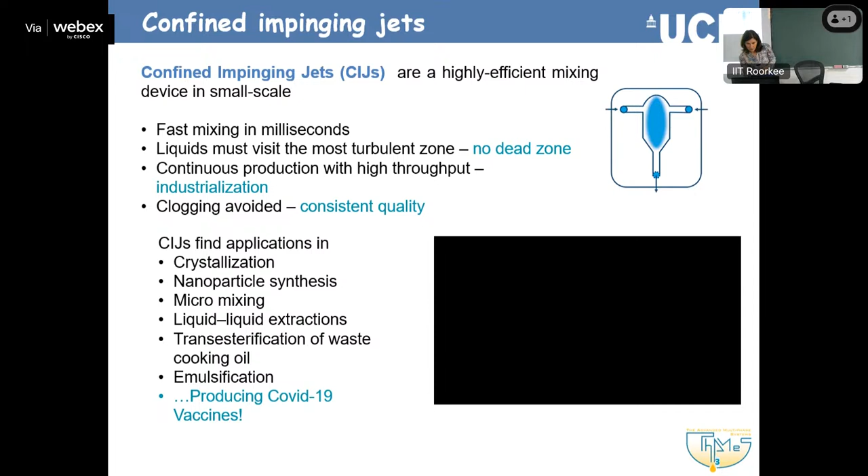Okay, yeah. I hope it doesn't change on its own. Scale out, number up. So we have one channel, works perfect. Let's use a lot of those. Any problems there?

Distribution - we have to consider the losses which are involved. We try to simulate dynamics, and when you go scale up, like from small to big, you have to consider all the dynamic similarities. Yeah, all the types of similarity, physical similarities playing a role.

This is important. That's how people used to do scale up, try to keep some sort of similarity between the processes. So if you have your small channels, one way to increase is what was mentioned, that you use more of them. The issue there, as somebody said, if you try to just use many channels, what is an issue? Flow distribution. How do you make sure that every channel has the same flow rate on paper, but in practice, how do you do that?

The other thing I will argue for as well is to actually increase the channel size. If you are looking for analytical applications, you can go to sub-millimeter channels, even smaller, because this is good, you decrease your sample volume. But if you want to think about production, there's no reason to go sub-millimeter. Actually, there are very good reasons to not go sub-millimeter because you might have some dirt, some impurities, and clog things.

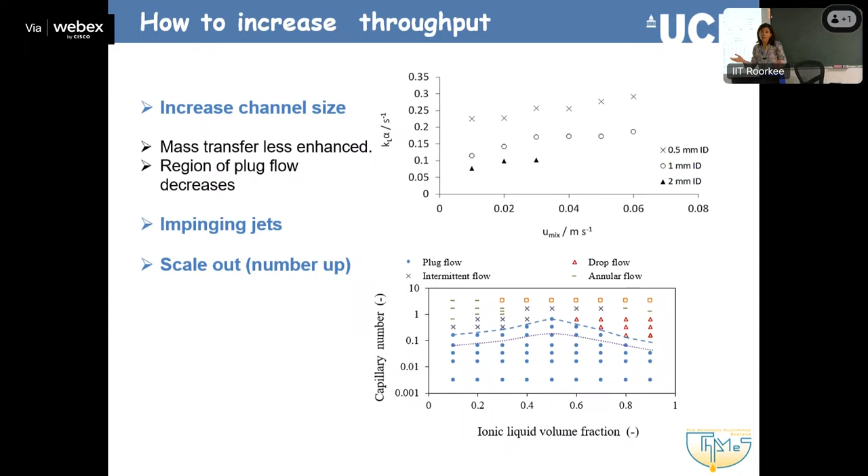Okay, let me see if that plays, because that's something a student found. I think there was a website here to attribute this, I should add it. So this is an impinging jet, and apparently, according to my student, it had been used for the COVID vaccine production. I can't believe it, but there's a reference somewhere. So basically, impinging jets is something we have started working on.

Impinging jets have been around forever in fluid mechanics, usually in unconfined spaces where two jets collide. And as all these microscale things started coming up, people have started limiting the space where the jets collide. This is how we work, with confined impinging jets.

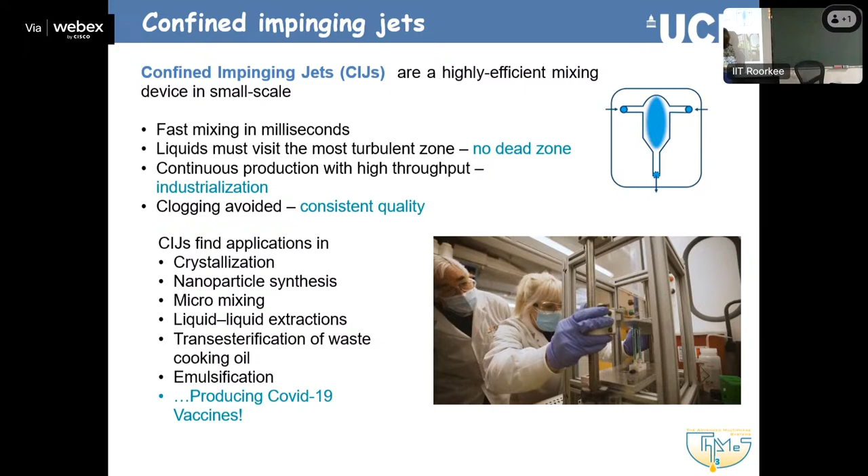So what you get there, as it shows here, is very fast mixing. And because of that, there have been applications in mixing, first of all, fluid to fluid mixing, crystallization, because you get very good mixing, nucleation happening, crystals forming, nanoparticle synthesis, which is related to crystallization, and so on. And we have used it for extractions.

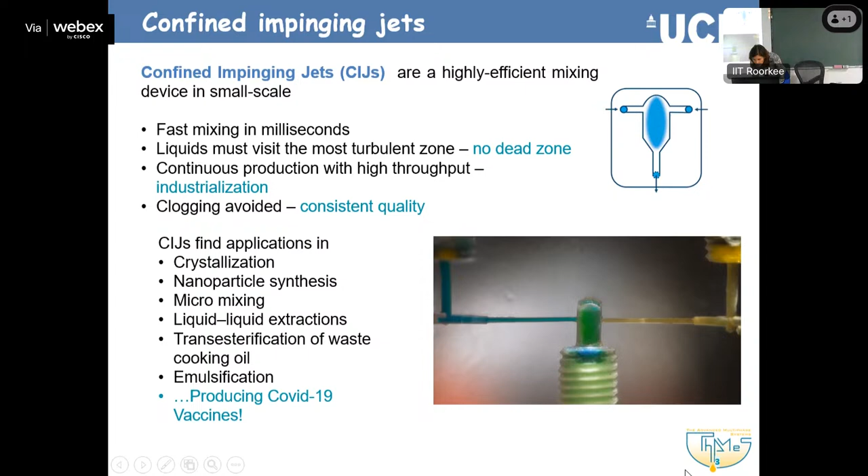Okay, so if you want, this is a cool video. I can give you the reference as well. So this is our impinging jets, and this is the first generation, let's say.

As you can see, it's a very simple setup, what we did in the lab. This was done with acrylic, that's our impinging jet here. You can also 3D print it if you have a 3D printer, which is more common these days. But in the end, we just connected those two channels.

Our first generation has this type of configuration: a T-junction where your side channels are very small, but the main channel is relatively bigger. So the fluids come in with quite a big velocity because they are in very small channels, and they impinge.

And because of that, that's the type of flow we form. So we form dispersions, coming back to your drops. But now we work more with these symmetric impinging jets, because with the earlier ones, in terms of mixing, there were some dead zones, so we thought we would try these ones.

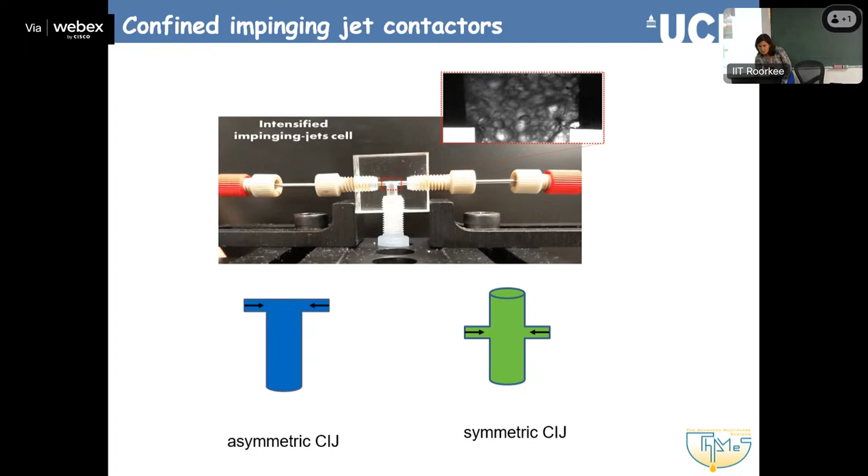I think I showed that to you before when we were discussing the different measuring techniques. So this is the setup we are using for the impinging jets, and this is the actual geometry of the symmetric impinging jets. Again, we have the two side channels here, they collide here, and then the mixture comes out both ways.

Some properties: we have played a bit with this inlet diameter size, we've gone down to 0.25, and with this outer tubing size. So the inner ones are the two jets, the outer is where the jets are, these two side channels, and the outlet is this main channel where we want our reaction to happen, or separation.

We use 2 millimeters here because I come from large scale flows. I have been working with oil-water flows at large pilot scales. One thing you have when you have two liquids is a lot of liquid, and if you start using solvents, it's a lot of solvent you have to do something about.

In fact, with these sort of systems, because the velocities are bigger, we start having a lot of fluids to deal with. So if it's not necessary, in this case we put the tubing small, because it means we have to handle less volumes of fluids, which is important. Gas-liquid flows are much easier, they only do this with air, at least at atmospheric conditions.

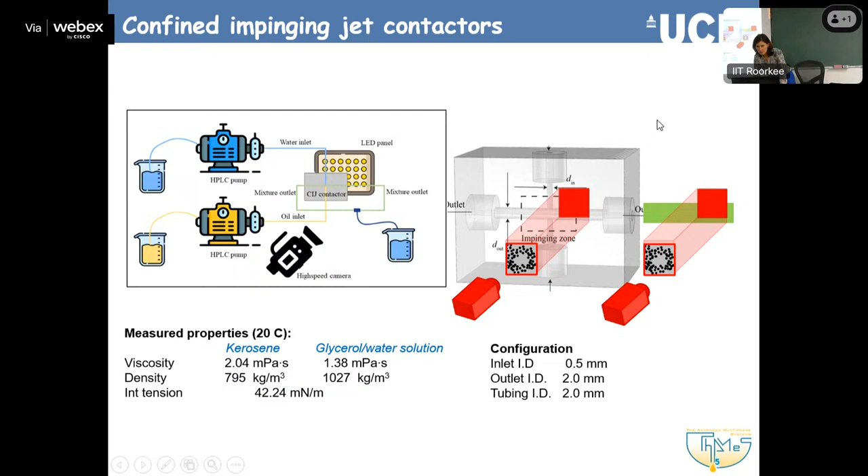Again, very briefly, these are things you find in the literature. We did a flow pattern map. In this case, I think we used some glycerol in our water, we had kerosene-water with some glycerol, just to remove some of the reflections. So we were able to improve the images a little bit, and you get all these flow patterns again.

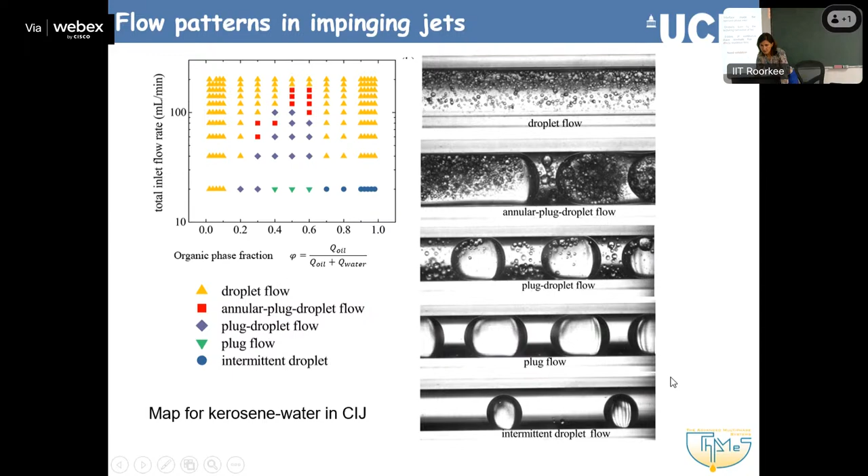The one we really want to work with is this droplet flow, or some variations of that, and we are trying to do some studies of these flows. Yep, and that's what you actually get in the impingement zone.

What we have here, and the reason for that is to aid visualization: we have the aqueous solution coming from the jet underneath, and the organic solution coming from the jet here. We have a lot less organic phase, and the only reason is so that we are able to see and take some images, some videos.

Because if you increase the organic phase volume fraction, it's very difficult to see. That goes back to what we discussed about imaging techniques. Imaging is marvelous, but once you start having interfaces, it's very difficult to see what's going on.

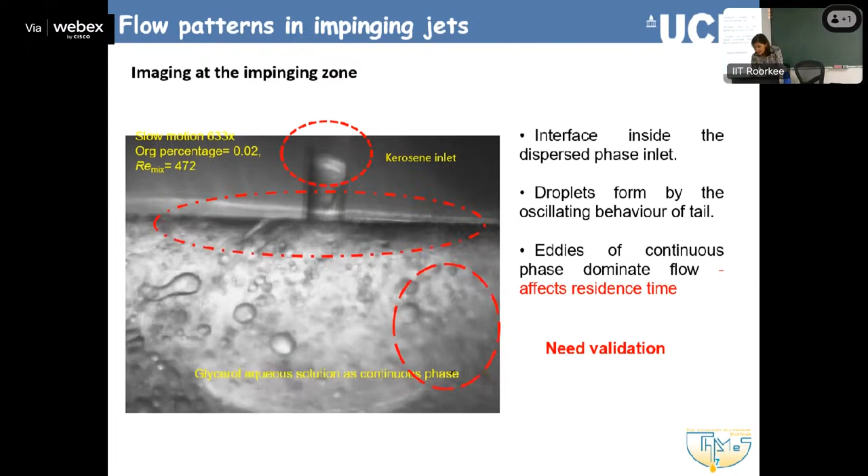So there are various phenomena. This is very interesting also just for studying how the mixing happens there before we move on to study the separation. There are various phenomena, and it's very difficult to actually see what happens with imaging. So we had our hand at trying to do some modeling, and there are some modeling people at the back there, but maybe how to do it better.

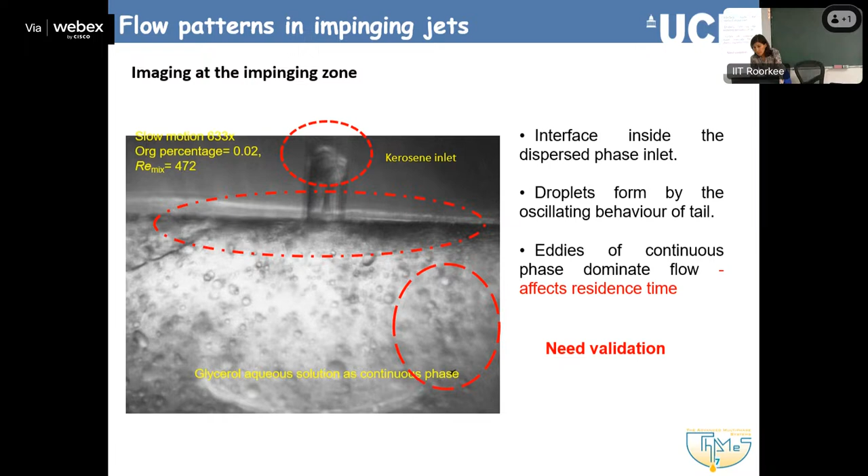We did use tools available outside, and we actually used this CFD, which combines volume of fluid with discrete phase modeling. Because what we found happening is that this phase comes in, and because the other phase hits it, it sort of spreads, creates a thin film, and then from the film, the drops escape and break. So basically we have this sort of configuration.

We have the aqueous phase coming here, colliding with the dispersed phase, the kerosene. It sort of spreads it out, creating all these thin ligaments from which the drops eventually break. So a lot of physics to study there, actually.

But to model it with CFD, it's kind of tricky because you model this part using volume of fluids. If you're not doing CFD, we're going to talk a bit about that today and tomorrow. But then what happens? If you have to create it, you can stick with VOF, but then it gets a very demanding simulation. You need very good resolution, very fine grids, etc.

That's why it's good to bring in a different type of model, the discrete phase modeling, which can better handle the dispersed phase. Of course, there are assumptions—you have to decide when you allow the transition from VOF to discrete phase modeling—but it's doable, and we've got some results.

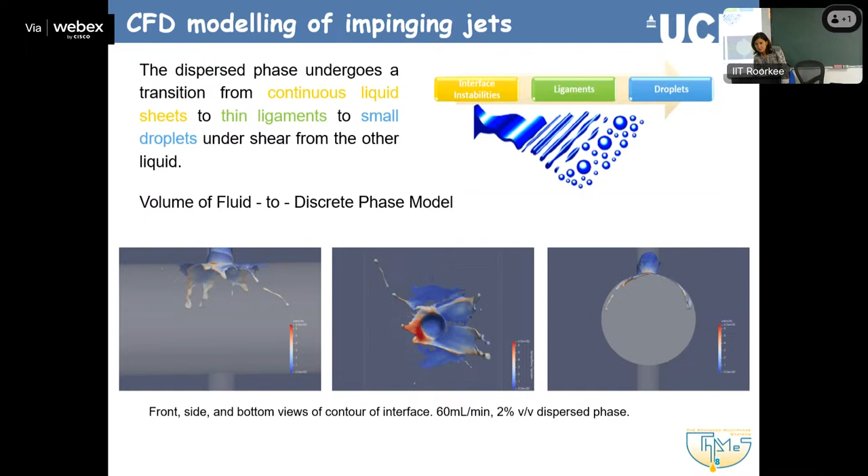They can be done better, but I think it's good enough to show us some of the phenomena occurring. It also shows exactly what I was describing before: you have the continuous phase coming in, colliding with the dispersed phase here, and here it is a velocity field, but that's what happens.

This is the movement of the flow that actually stretches the dispersed phase. And you can't do that with imaging. With CFD, you can take images wherever you like—it's not like the camera that's fixed in one position.

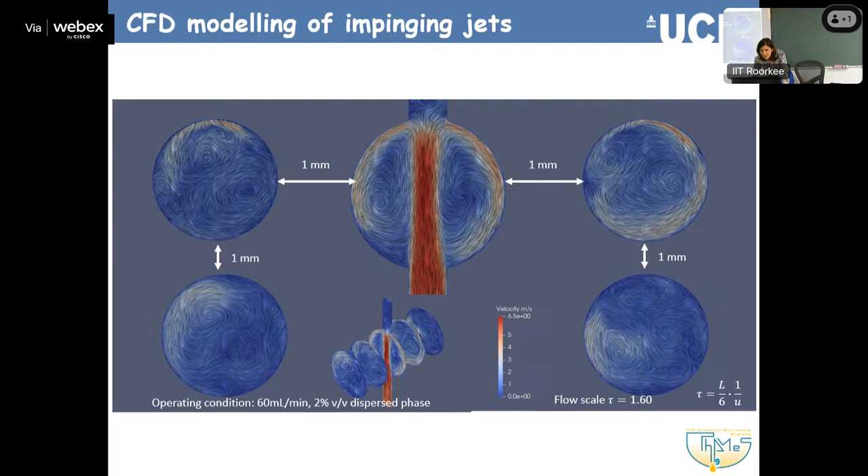So this is what happens at the colliding zone, at the mixing plane, and how that changes as you move further away. Nice images. We got some results as well, and we were not terribly unhappy. I think I have some comparison—maybe I should mention the comparison first and then go back to the results.

So we did drop size distribution measurements with the CFD. We measured the drop sizes that CFD gave us, and also with the experiments. The experiments are in blue, the CFD is in red. There are some variations, but we were not very unhappy with the comparison.

There are reasons why things could be improved in terms of CFD. In the CFD, we didn't allow breakage after the impingement zone—after the first drops broke, we did not let any other breakage, we allowed only coalescence. There can also always be a question of, even from the measurement, how small drops you can measure—you can see the quality of the images, because we don't match a refractive index.

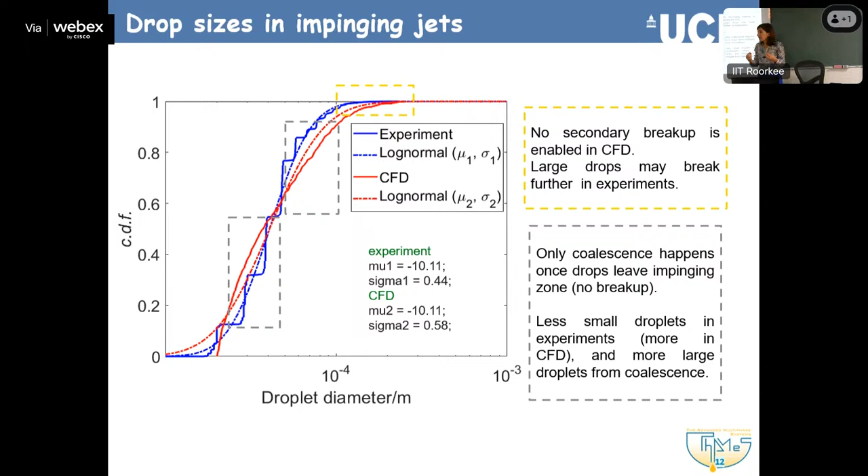So if people are interested in the hydrodynamics, the fluid mechanics of this configuration, it's a nice problem.

But again, I showed you this graph before, but it just shows how the jets work. Here we change the velocity, the total velocity at which the two phases collide—that's how we define it. What we get is, as you would expect, as your velocity increases, your drops get smaller, which is good because it increases the interfacial area.

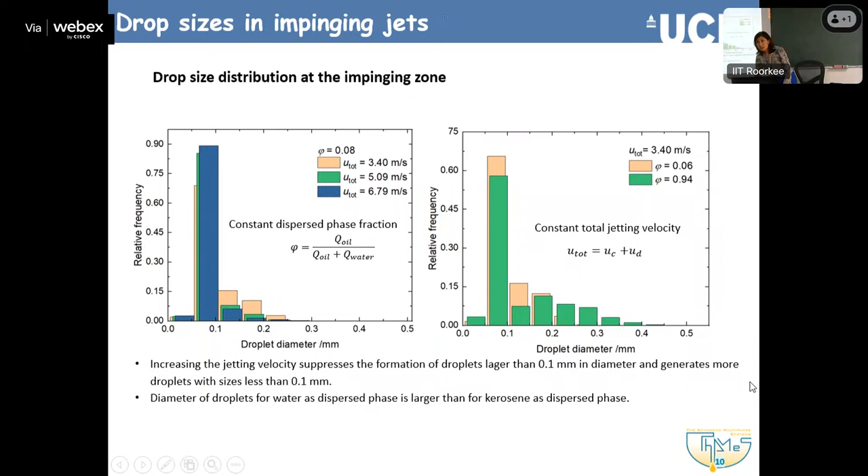The other effect we discussed a little is that when we use a very small or a very large fraction of the initial dispersed phase, we are swapping which phase becomes continuous, which again is expected. In all these cases, because we wanted to do imaging as well, we really needed to stay with low fractions of the dispersed phase, otherwise we wouldn't be able to see anything. But then in that system, we also used ultrasound probes later on to get information at higher volume fractions.

Some more results on the average drop size. Are people familiar with this way of defining average drop sizes, the Sauter mean diameter? Yeah, so this is one way to define drop sizes.

You use the cube over the square, the sum of the cube over the square diameters of all your drops. There is the arithmetic mean drop size as well. Various ways to compare drop sizes. And we have that again, the average drop size with the total velocity.

As you can see, we start D32, for example, from 200 microns. It can go down to, what is that, 50 microns. And also the interfacial area, because this is what we want to have for mass transfer.

I've shown you that. And again, this is available in the literature as well. People try to form some correlations on the drop size you get with the mixing intensity.

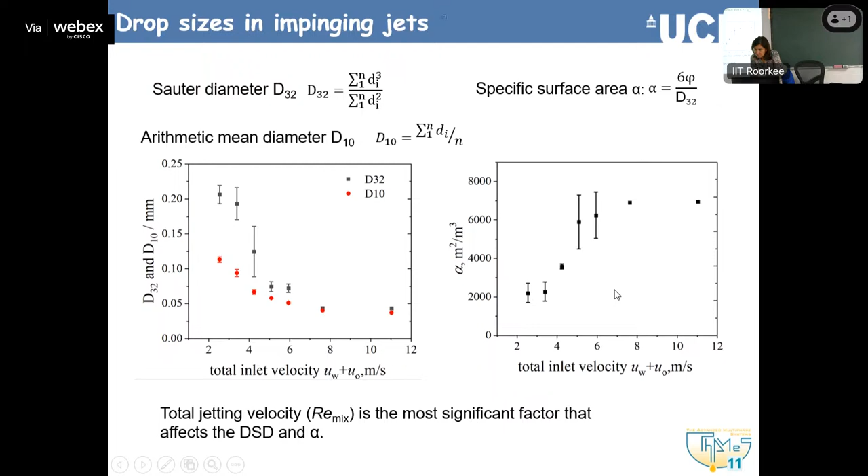The interfacial area, after a while, it's becoming constant despite the fact that the total velocity increases. So this is the limit to which it operates. It's basically what you get here as well, isn't it? Your Sauter mean diameter doesn't change after a certain energy input, which is related to velocity. There's no point operating after that.

Yeah, I would say in this system. At the moment, in this system, yeah, because we haven't looked at different fluids, so one of them could be a limitation which could give smaller drops. It's not a limitation, it's not... unless there are other benefits, there's no point, because higher velocities mean more power input for pumping. So if there is no reason to go faster, why go faster?

Will we gain anything from going faster? I don't know, probably nothing. So there's no point to go faster. Pressure drop would be higher. Yeah, exactly, the whole pumping. So yeah, exactly, you can get information like that—really you're not gaining much if you push your system.

Okay, so this is the impinging jets. We said there are three ways to improve the throughput. One is to just use the original channels, just make them bigger. The other is to use impinging jets, so in this case we make our fluids flow faster when they join in the mixing zone. And the third is to actually do the scale out that we were mentioning.

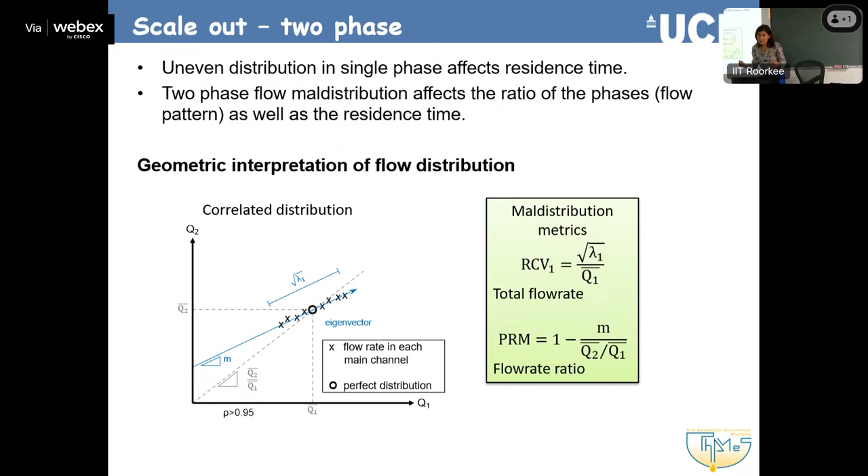So what we say is that we have used these maldistribution metrics, one for the flow rate and one for the flow rate ratio or fraction—the ratio was easier to derive from the equations. The smaller these are, the better the flow distribution. So the flow rate metric is basically how much this spread is, and the flow rate ratio is the angle, or the slope of the line of actual flow rates compared to what we should have if all channels had Q1 and Q2. We use two metrics because we need to ensure two things are happening, so there is extra complexity compared to single phase flows.

We decided to go with this approach, something we developed in the lab. It makes sense: we have one channel, one inlet for one phase, and one inlet for the other phase. We split them into as many channels as we like, and each one has a manifold for the single phase, then we join these single phases.

So we have to worry about all the resistances that go in. It's long - there's a paper on that you can look at - but using these laws, every connection point's flow rate should obey mass balance. So what comes in here as Q1 should equal this flow rate and this one. Also, in each loop, the resistances and pressure drop should balance. You get a system of equations that can be solved. It's not as difficult, we just need to go through it systematically.

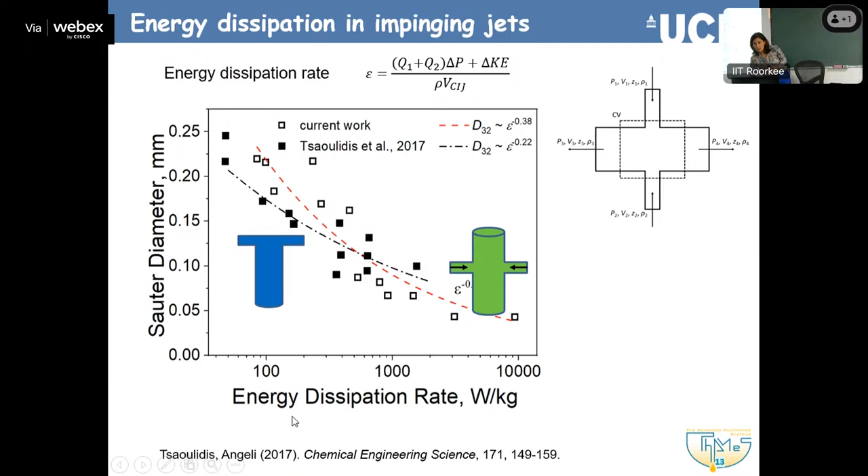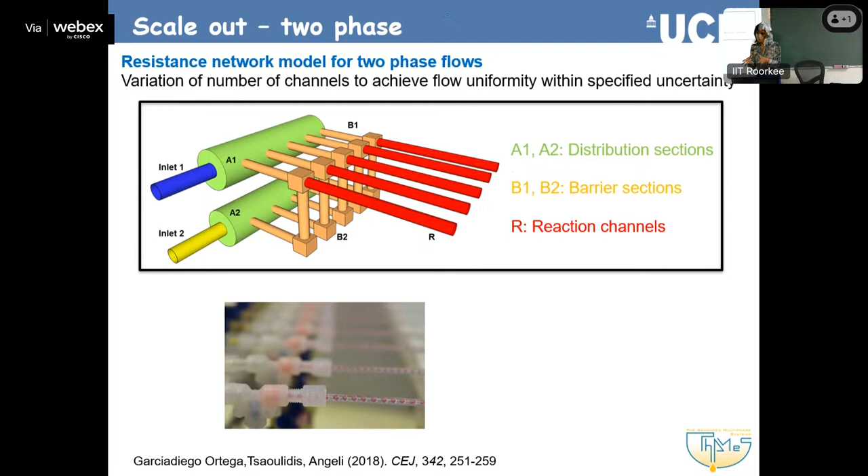It's fine, but you always have to think, if it's for application, how easy something is to actually do. You can do that with tubes, but if you want anything tapered, then your fabrication becomes more involved.

It's not impossible. It might actually be quite easy with printing today, depending on the size. Just bear that in mind as well. It's not good, it's not bad, it's just one thing to consider. But you can do it because the model can accommodate these things.

These resistance network models can accommodate these things. The example is what I said here: this means that the resistance in this part is not the same as the resistance in this part.

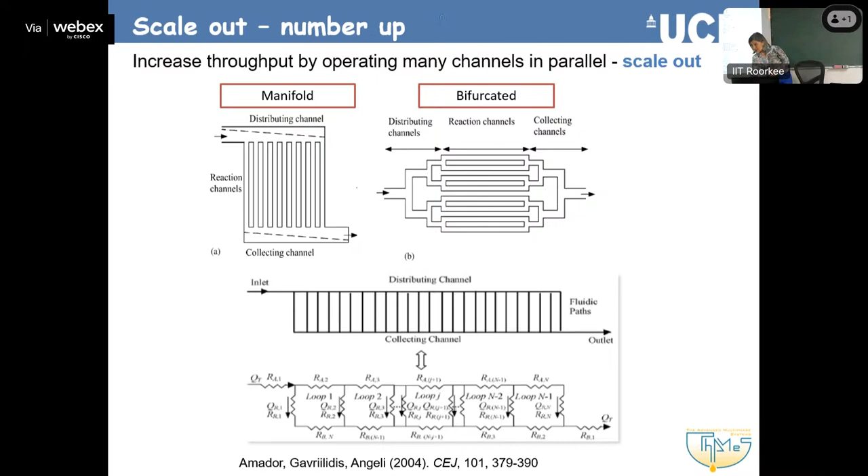And actually finding resistances, so with these models what you do is basically calculate resistances, which you then interpret as channel size, because you have certain fluids. So what the model finds for you is resistances, and then you say okay, this is the resistance. The resistance is basically the frictional pressure drop. The pressure drop is the flow rates and some friction factor, effectively, which is the resistance, which includes the size of the channel, the flow velocity.

So you can have different geometries, and you just work backwards: you first calculate the resistances that will give you the distribution, and then you work back to see what's the geometry there. So yeah, you can.

What I wanted to show you very quickly is some considerations as well, just to connect it nicely. So then what happens, and this is more like design considerations: we wanted to have a manifold for the lab that had 5 channels.

We made one for 10 channels, but we're not using it so much because, as I said in the beginning, liquid means you have water, but you also have an organic. Organics you need to recycle because you cannot just put them down the drain, which means you have to start worrying about holding fluids, keeping them. So the higher the flow rates, the more fluids you are working with, so a manifold of 10 is a lot more volume than a manifold of 5. We've done a lot of work with a manifold of 5, but it's nice to demonstrate it for bigger, especially for industrial applications.

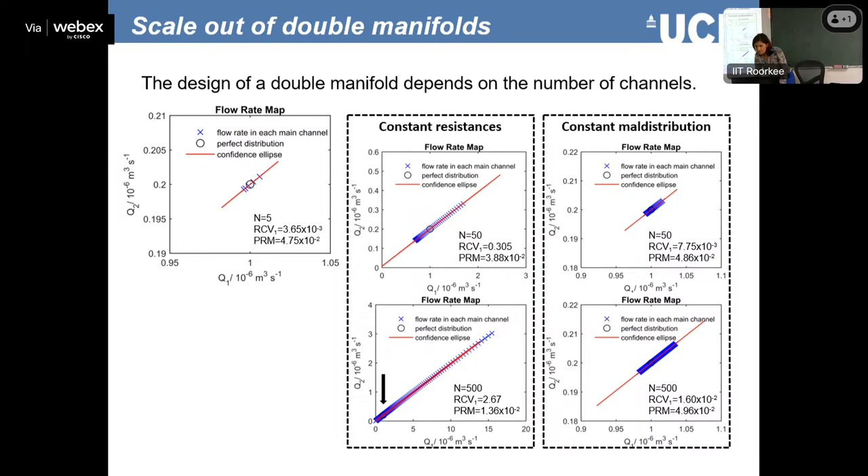So something else, bringing in pumping as well. I'll explain you these two graphs. Again, it's fancy drawings, somebody's PhD was spent on those. It's not something you really do now in an hour, but it's just the concepts to bring in.

What we did here is we tried to do this parametric study, let's say. What if we change the channels? How much do we affect this maldistribution? We did that first, and then we went to decide the one we made in the lab. So we played with the two resistances, the ratios. You remember we have the main channels, the barrier channels, and the reaction channels. We played with the ratios of the resistances because it was easier to get them from the model.

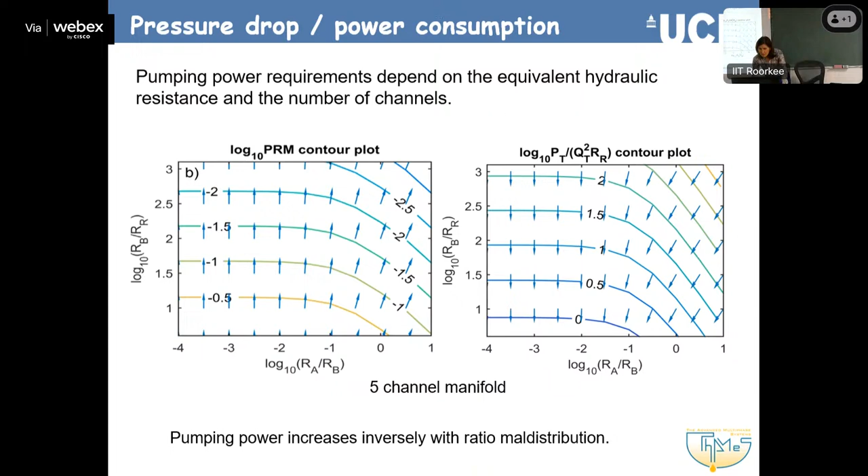And then, again, we started thinking, because it can be a little bit daunting if you go to industry and say, I need, I can do you a very good extraction, but I need, I don't know, 200 channels - it's kind of not there yet. So what we found is that we played a bit with the metal concentration, because there's a requirement to get 6 kilograms per day of this metal separated. So we played a bit with the concentrations, extractant, because all these things can affect how much you extract in the end: the concentration, the initial metal concentration in the aqueous phase, the percentage extraction, how long your channel is, what volume fraction of the two phases you use.

And we found that, well, we did all our work with 2 millimeters. We found out that we needed 92 channels. If we increase the channel size, we need 23 channels. And if we play with the concentrations more, then with a 4 millimeter channel, we might only need 7.

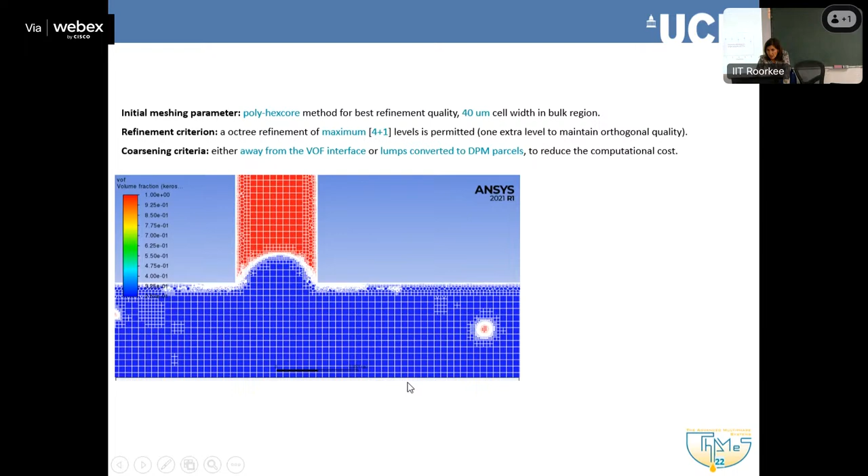Yeah, that's all - I'm actually quite fast. I wanted to show on scale up. So I'm happy to take lots of questions if you have.

Yeah, anything, we can go back as well. Might have gone a bit quick in the resistance network.

From a maintenance point of view, you have to stand by at least two other units. Because two pumps are running. They have one pump - pumps are a big issue. Yeah, you need to have pumps.

So one system, we managed to destroy one actually because we made our initial manifold out of acrylic. Acrylic is nice because you can see through it, and you can also do that. I don't know if people have access - we have a workshop with a CNC machine that could do acrylic.

Especially if precision is not required, there's some very good 3D printing going on, so you can actually do quite a few things with printing. You have to be careful with your materials because all these extractions have acids and oils - this is one thing to be careful of. But we are trying to see if we can do manifold printing rather than acrylic. Acrylic is perfect, but can be quite sensitive.

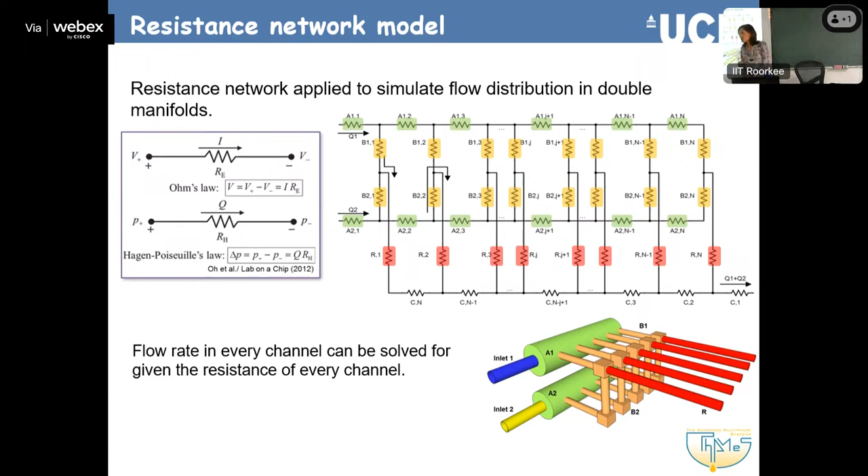But once we go into this section here, then we use - so this is the one that we fabricate, and then we use a lot of tubing connections, which is very easy to change. So we don't do microfabrication, not even fabrication - just tubing connectors. So it's quite flexible in that sense.

Yeah, you can change your tube size to 4 millimeters. You did it the other day in your experiment - you changed your tube size, so it's very flexible.

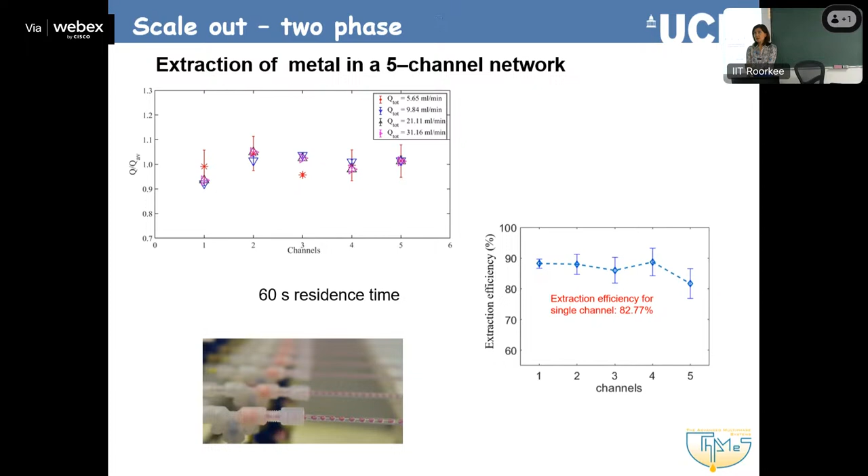And you have to start thinking about the pumps - that's the other thing, because it's like PIV, there's a fine line. You can't do standard PIV if you have a few millimeters or centimeters in your tube. If you are below a millimeter, it's nice to do micro-PIV, but there's an in-between that sometimes is not very clear.

Your channels are too big or too small to use a plain laser. Same with the pumps here - it depends on the fluids as well. You can use syringe pumps that are used extensively for microfluidics, even if you go to 4 millimeter channels. Then you start talking about bigger pumps.

And there is a kind of - not a gap, it's an area where you have to find the right equipment. It's neither small nor big, but it's somewhere in the middle.

So it's in between, I would say, scale-wise - when you start doing the experiment, you have to think about what's required, but fabrication can be done.

80% extraction, the recovery is 80%. This is not extraction efficiency, it's the recovery - so 80% of the metal from the original phase went through. But if you want to go longer with the setup, that will be limited by the equilibrium concentration - you cannot go beyond that.

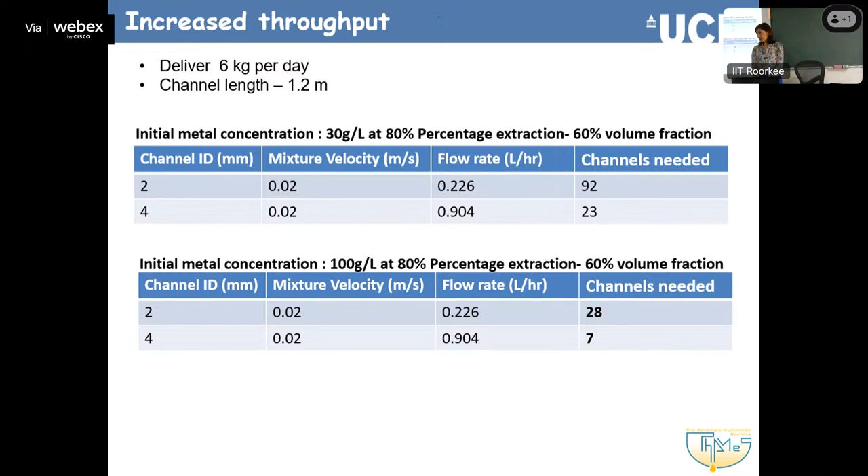So then this is the other issue - I think I showed it a bit in the previous slide, a bit in the previous one... no, here.

There are various scenarios on how you can do this. You might need to go with traditional mixer settlers, where you take the material out of one stage and put it in the next. You can then feed fresh solvent, or have some sort of counter current operation, so you have to separate them. As you do in a mixer, scaling out, right?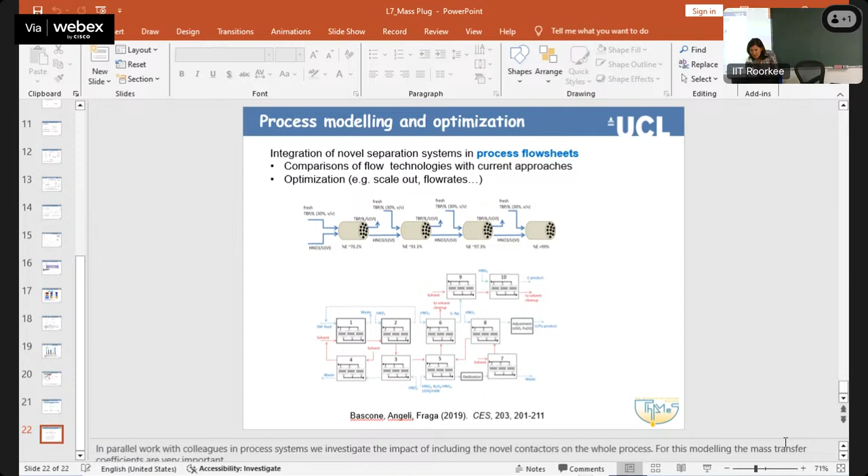So basically what I was showing you here, let's make it bigger. This is all schematic because we have not done it at this scale. But basically you have your batteries, let's say, of units of 5, 10 microchannels. And then you may need to remove, as I have it here.

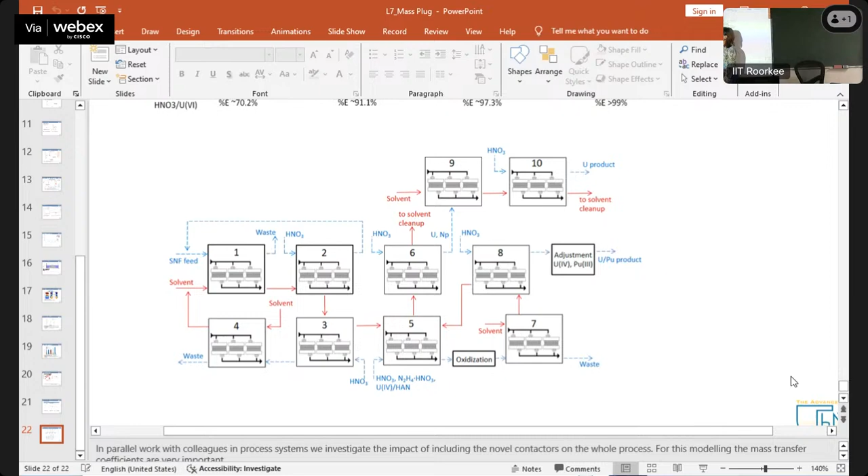So you feed either the aqueous phase or the organic phase. Here the aqueous phase goes to the next stage, and then you feed fresh organic phase. Or you can do it counter-currently, which means this goes this way and the organic phase goes this way. So that's the separation we need for the two phases, in between.

So would you suggest a common separation or an independent separation? Maybe each channel has its own separation. That is something we have not kind of decided yet. So it depends, I think you can do both.

At the moment, we just collect them all because we don't have many separators. You can think either way. I think a common separation of batches of a few is more realistic. But of course you have to account for this resistance into your resistance network.

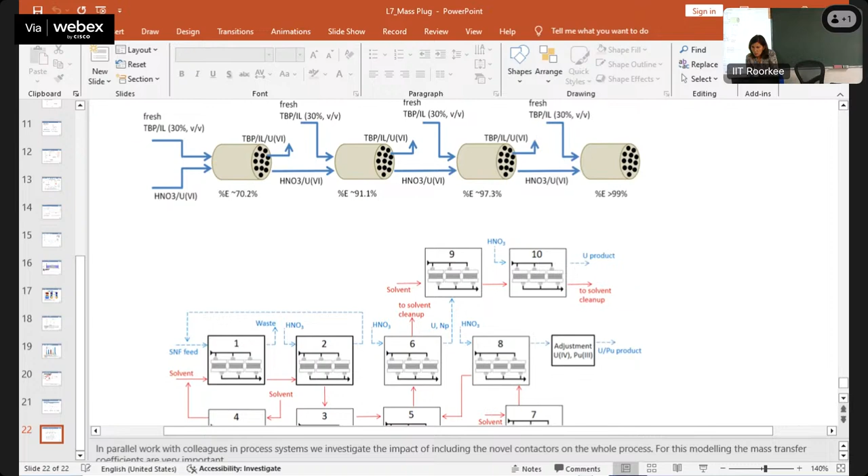Can we use a sensor and flow controller in an individual channel? What we have done, yeah, but you have to think a little bit about it. What we are doing now, since we're talking about this, let's go back here.

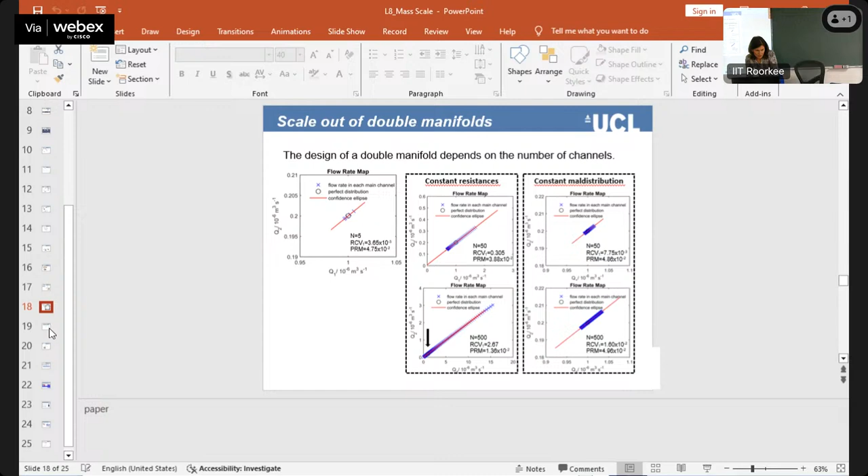Because what we found out, you see the result here, the camera can be quite difficult to use, because that's us trying to take photographs. You can't really. So what we are doing now is, for this system, for plug flow in transparent channels...

We are developing light sensors, and we now have actually individual sensors in each one of them, with the light just using absorption, like a simple LED. And we try to read the signal, so you get the signal from that, but from 5 channels at the same time.

Yeah, I mean you can. The thing is to try to check, because with a camera it can be quite tricky. So to get these results, what we did is we actually collect it at the end, per channel, over time, which is straightforward and easy.

Is there any issue in that? Yeah, but you have 5 collecting tubes and you get them at the same time. It's okay, I mean it's a good reliable method. It's just that if you want to automate it a bit more and get more information, like plug size, frequency, etc., we are using these light sensors.

But you can think of that with any other sensors. Sound might be good as well. It depends, I mean people are developing conductivity sensors too. There is work happening to actually investigate online. Conductivity can also give you perhaps the metals as well, but I know some chemists are doing work on that. So yeah, there are opportunities there, but yeah, the answer is yes.